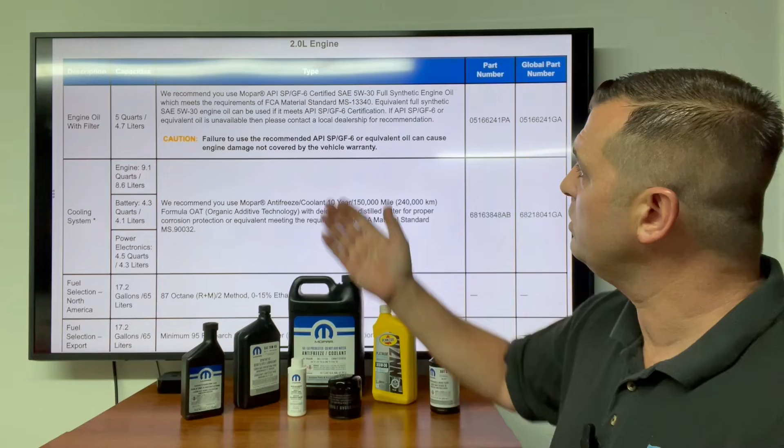Now when it comes time to do your oil changes, you need to know that it does take 5 quarts of engine oil, and it does take 5W-30 full synthetic. As you can see here, this is the full synthetic 5W-30. This is what they recommend, the Pennzoil. Now also with the oil filter, it doesn't show you anywhere in the owner's manual about the oil filter, but as you can see here, we're going to be using this part number right here, which is going to be 4892339AB. Now this could supersede to a new number sometime in the future. This is the oil filter that the Jeep Wrangler 4xe with the 2.0 liter takes.

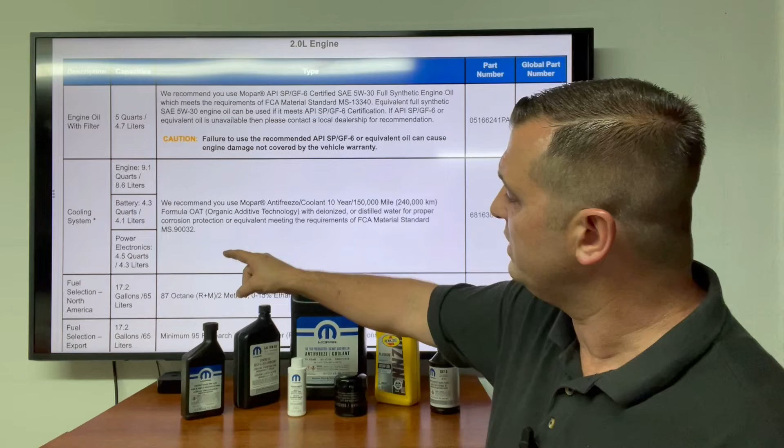Now let's talk about the cooling system and the antifreeze. As you can see here, there are 3 different sections on the cooling system: the engine, the battery, and the power electronics. There are 3 different cooling systems that this electric Jeep Wrangler has. So the engine takes 9 quarts, the battery pack area takes 4.3 quarts, and the power electronics takes 4.5 quarts.

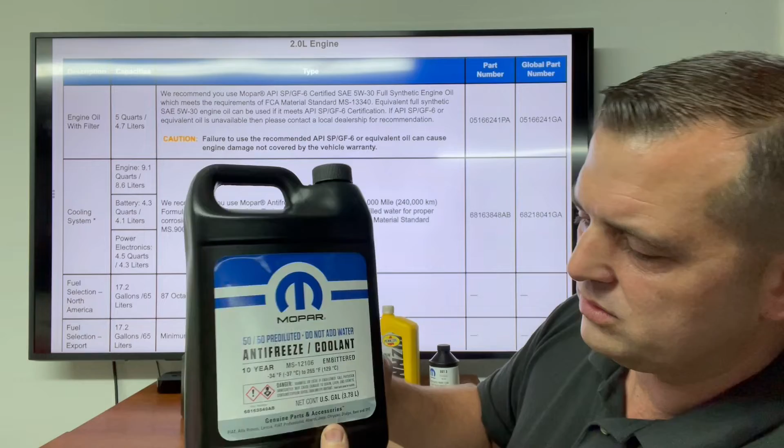Now what we're using here is this 10-year 150,000 mile antifreeze. It is OAT, which is organic additive technology. So make sure that you get this specific kind here. The part number on this is 68163848AB. Now I will put all of this down in the description below so you can have access to these part numbers. All right, moving on to the actual transmission itself.

This is an 8HP75PH transmission. It is made by ZF and is a special transmission for the electric Jeep Wrangler. Now starting off with the facts here, it does take almost 9 quarts of fluid. Keep in mind this fluid is very expensive. I priced some out at the dealership and it was $52 a quart. So I'm sure you can probably find some somewhere else for cheaper, but I would honestly not recommend doing anything to the transmission. If there's something going on with your transmission, make sure that you see your authorized local dealership. Just make sure that they're using the right fluid.

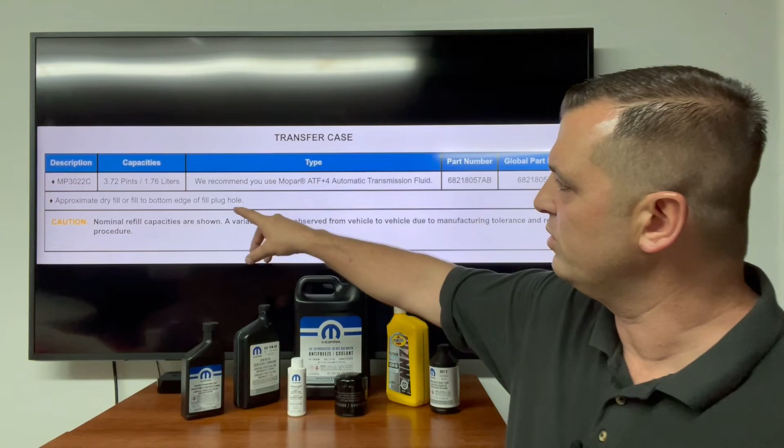Moving on to the transfer case here, it does take 3.72 pints, and it uses just regular ATF, like transmission fluid. So that's a pretty easy one there. If you do need to service that one, there is a plug on the bottom that you drain, and then a plug at the top where you would fill it up. As you can see here, you would fill it right up to the bottom edge of that fill plug.

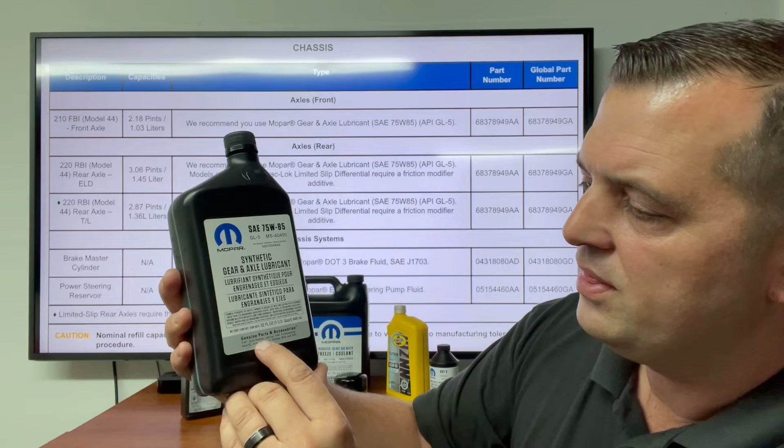All right, let's talk a little bit about the differentials here. On the front differential, it is the same for the Rubicon and for the Sahara. We're going to be using this right here, a 75W-85 gear axle fluid. The part number for this is 68378949AA. All right, this is what they recommend for the front, and the same thing for the rear.

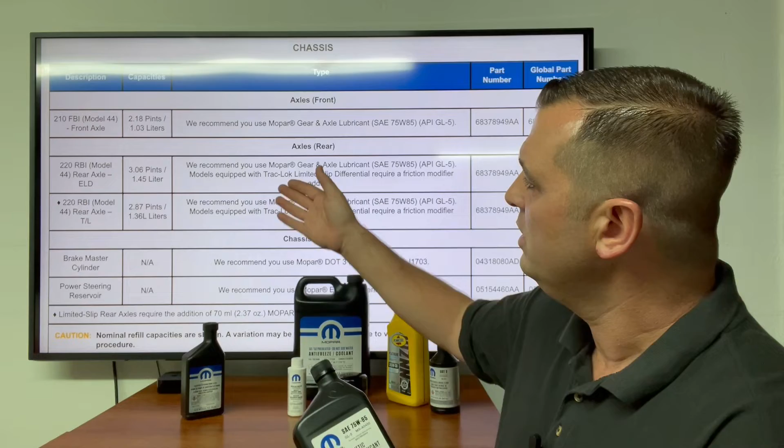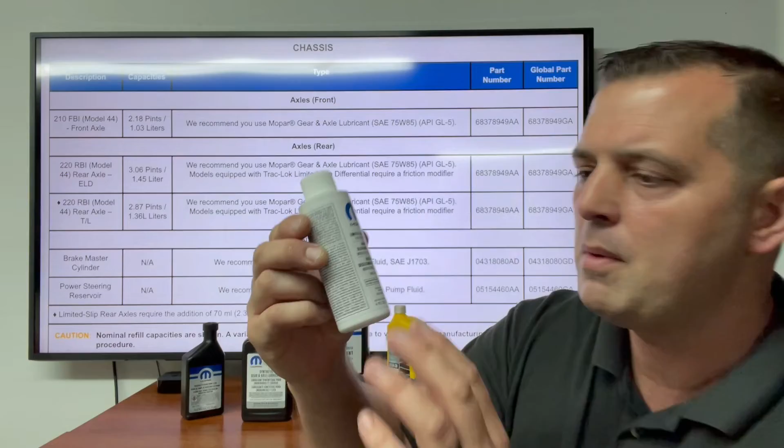Now the front does take a little bit over 2 pints, and the rear, depending on which model you have, takes 3.06 pints or 2.87 pints. Now do keep in mind, if you have the limited slip, you will need this friction modifier here. This is not in this. Keep that in mind. You have to get this separate. So this part number here is going to be 4318060AD. You can see right there. And remember, I will have all these down in the description area below.

Now I will have to say, in the service manual, it does not say anything about changing the brake fluid, but as being in the car industry for almost 25 years now, I will have to say every other make and model recommends, even the National Highway Traffic Safety Administration recommends that you replace the brake fluid every 2 years or 24,000 miles. Now, if you're going to do that, make sure that you use the DOT 3. Now, you can upgrade to the DOT 4, which is synthetic. So just make sure that you at least use the DOT 3. This is the Mopar brand of the DOT 3.

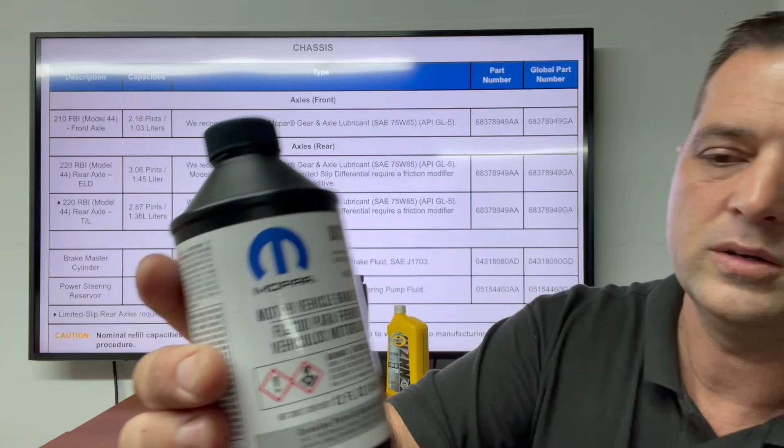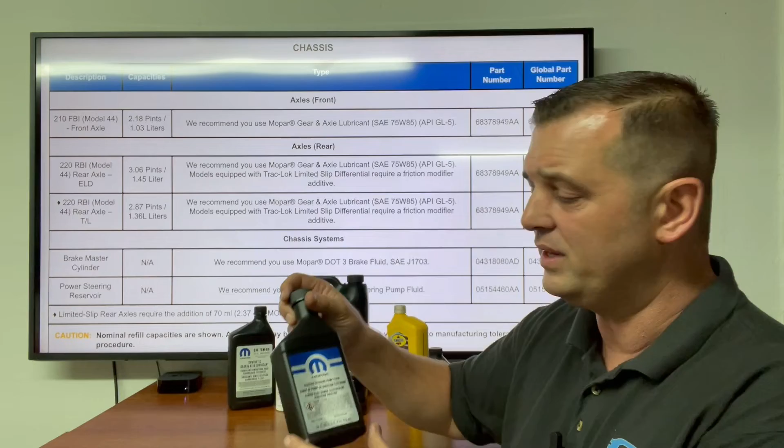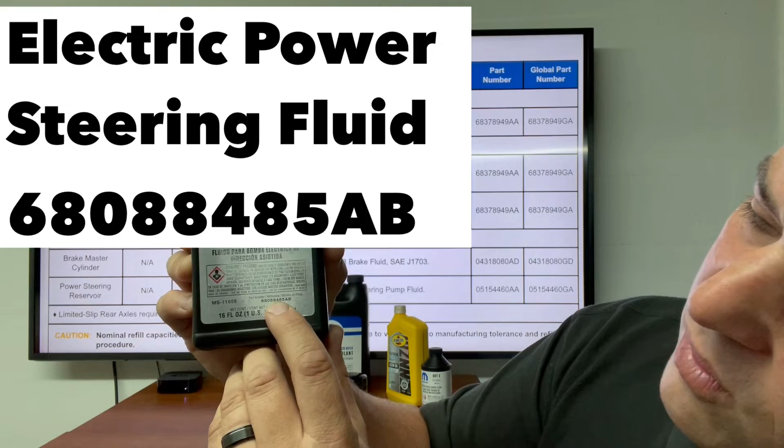Now, power steering. The power steering reservoir, if for any reason you need to fill up the power steering, it does take a special fluid. It has an electronic power steering pump. Now keep that in mind. Here's the part number for that. You can see right down here. All right, this is 68088485AB. Now, I don't think that there are any service intervals on the power steering, but we'll get to that in just a minute.

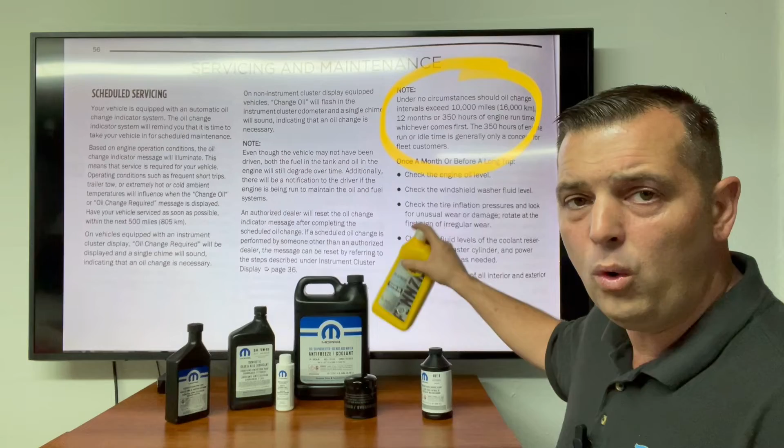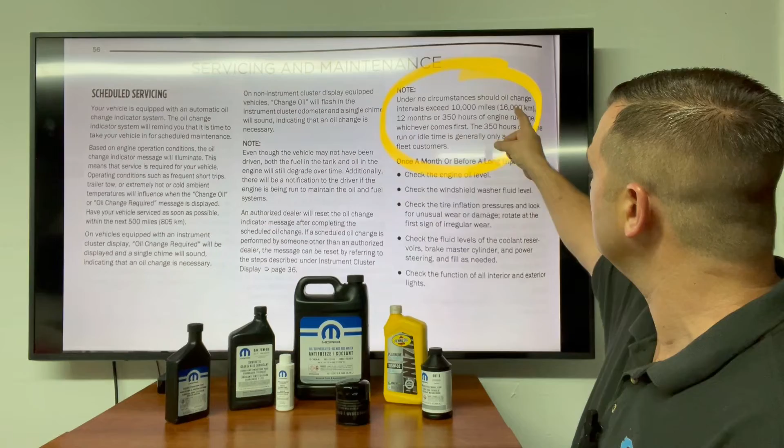Now, I want to go back to the oil change here because I talked to you about what oil to use and what filter to use, but we did not talk about the maintenance intervals. Now, the very first thing that it says in your owner's manual is right here. Under no circumstances should oil change intervals exceed 10,000 miles, 12 months, or 350 hours, engine hours, that is. Now, the first thing that concerns me a little bit, it says 350 engine hours. Now, we have no way of checking the engine hours, but I do think on police vehicles or any type of fleet vehicles, maybe in the future they're going to come out with some type of fleet 4xe, that you will be able to check the engine hours.

But for right now, we have to go by do not exceed 10,000 miles or do not exceed 12 months, okay? I don't care what your little indicator says on your dash, all right? Don't go past it. This is crazy. 10,000 miles is a really long time, guys. And I do know that all of those 10,000 miles are not driven with the engine running. But let's just say it's 75% of the time. That's still 7,500 miles on the engine. A lot of different driving styles that people have, so you really can't put a specific number on it because you don't know. Some people may be driving in electric a lot more than some people are driving just in gas. Me, I did my oil change at 7,500 miles, and I'm going to guess that my engine probably had about 5,000 miles on it.

Guys, I just want you to be aware, please do not go more than 10,000 miles, even if your indicator says you still have more life to go. 12 months or 10,000 miles, okay? I would prefer to see you at 7,500 miles just to make sure you don't do any damage to the engine or anything like that, just to protect yourself. You do have those 3 oil changes that come with the Jeep, so just make sure you use them.

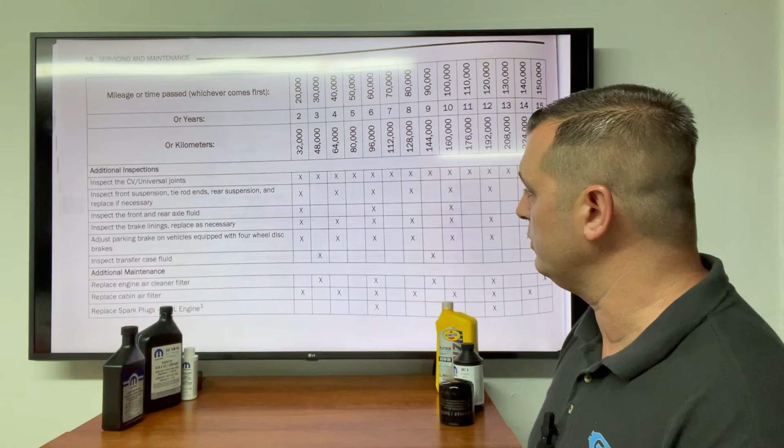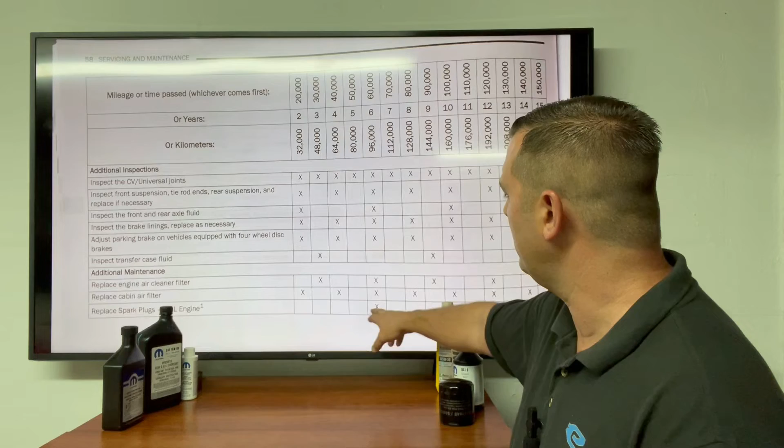So your cabin air filter is every 20,000 miles, and it looks like everything else is in spec. Replace the spark plugs on the 2-liter engine right here, every 60,000 miles. All right, keep that in mind. 60,000 miles, we got to replace the spark plugs. Now that could get expensive. I don't know how much the price of that is, but just keep that in mind.

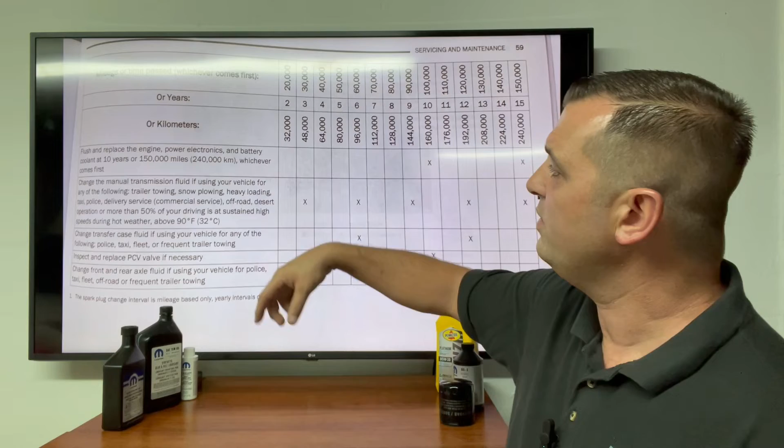All right, so the next thing you're going to see here is flush and replace the engine, power electronics, and the battery coolant. Remember, we talked about that antifreeze. That has to be changed out. But when? It doesn't have to be changed out until 100,000 miles. Check this out. 10 years or 150,000 miles on the actual antifreeze. Now, this is very interesting.

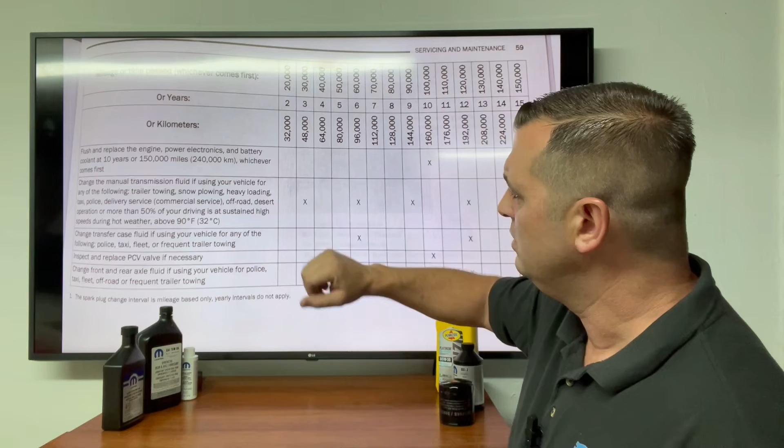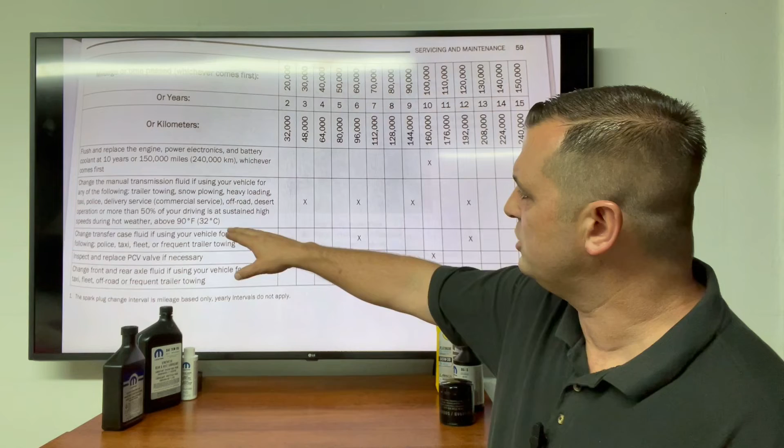Change the manual transmission fluid. All the 4xes come with automatic. We can't get manual in a 4xe. Not really sure why they have that in the 4xe supplement. This is something that concerns me a little bit here. Let's talk about the transfer case and the front and rear axle fluid, okay? So it shows every 40,000 for the rear differential and front differential, but every 60,000 for the transfer case.

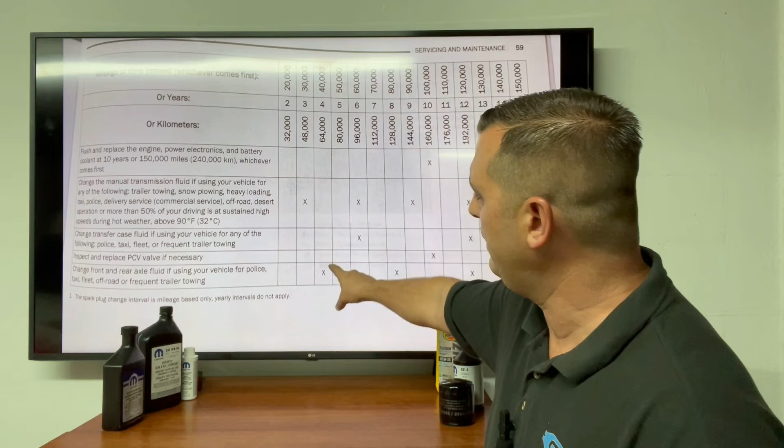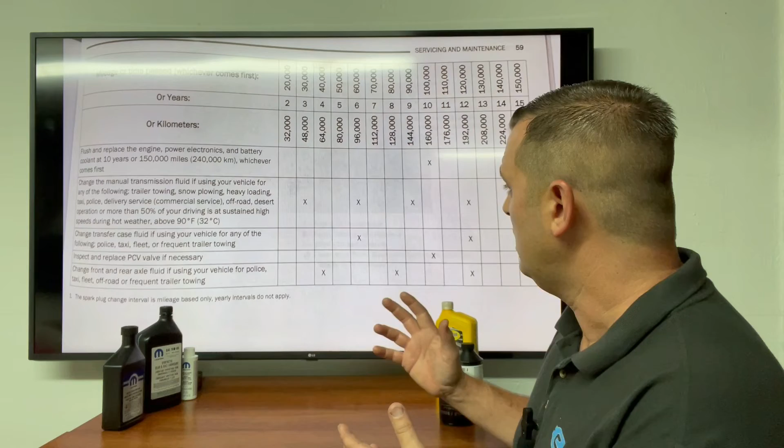Now, I'm going to be honest with you. I think 40,000 miles is a little too long for the actual rear differential. I know that's what the owner's manual states, but what I have seen in the past is 40,000 miles is just too long to go on that fluid. I do know that it is synthetic fluid, okay? I've seen a lot of axles with 20 to 30,000 miles and the fluid just is black. It just looks like diesel oil.

So I want to be honest with you, my personal opinion, I want to change my differential fluids every 20,000 miles. I'm probably going to change the transfer case fluid also every 20,000 miles. That may be a little excessive, but you want to take care of your Jeep, okay? Because maintenance is cheaper than repair. We did miss one thing here, the PCV valve, at 100,000 miles. So at 100,000 miles, you're going to need to replace the antifreeze in all three things, and also you need to replace that PCV valve.

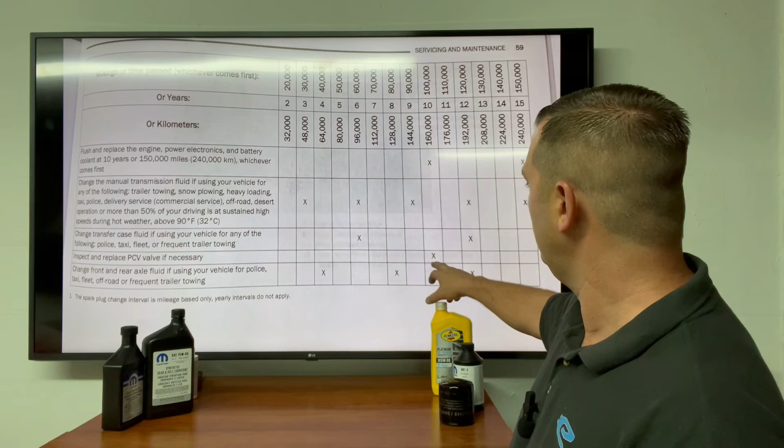Now, one thing we haven't talked about yet is the oil change reminder. That oil change reminder in your instrument cluster is a calculation based on a lot of different things. It's based upon the last time it's reset, the engine hours, how many fill-ups of gas that you've got, how long the engine's ran, how much electricity ran. There's the time, there's just a lot of different inputs that come in to calculate that number, okay?

I was at 7,500 miles when I went to get my first oil change, and I think it was 52% left on the actual instrument cluster. If I would have waited till it got to 0% and told me I needed to change my oil, it probably would have been around 15,000 miles. Guys, I know this little indicator is nice to have, but I'm gonna be honest with you, I'm not a big fan of it, and I think it doesn't really give you a great reading. It's just an algorithm and a calculation based on a lot of different inputs. So you really need to stick with a mileage based oil change interval.

And I do think this here is a little excessive, 10,000 miles. There's just too many variables to know what different people are driving. So my personal opinion, I understand it is synthetic oil, but if you go 7,500 miles, what's going to happen is you're going to get to that 7,500 miles, and life is busy, guys. You're going to say, hey, I need to get my oil changed. The next thing you know, it's 2 weeks later, it's 3 weeks later. Now you got 9,000 miles on the Jeep, and you're getting the oil changed. That's why they say don't ever go over that 10,000 miles. So just remember, at 7,500 miles, go ahead and get the oil changed because life is busy.